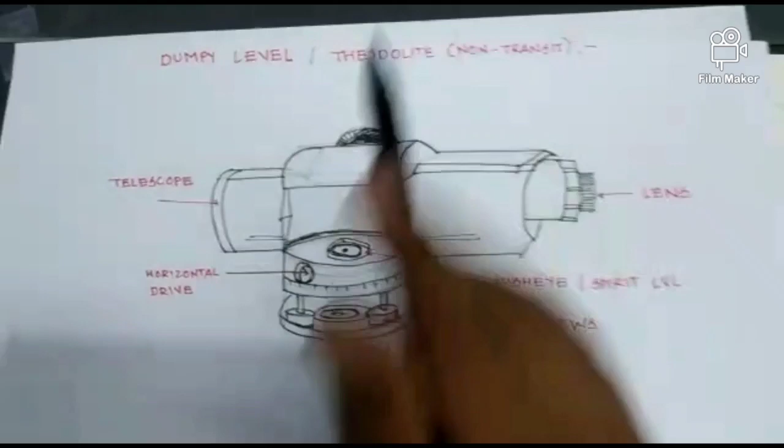This theodolite consists of a telescope and a lens. This lens is used for the adjustment of the crosshair to your eye. We take readings by looking through this lens or telescope at the different levels.

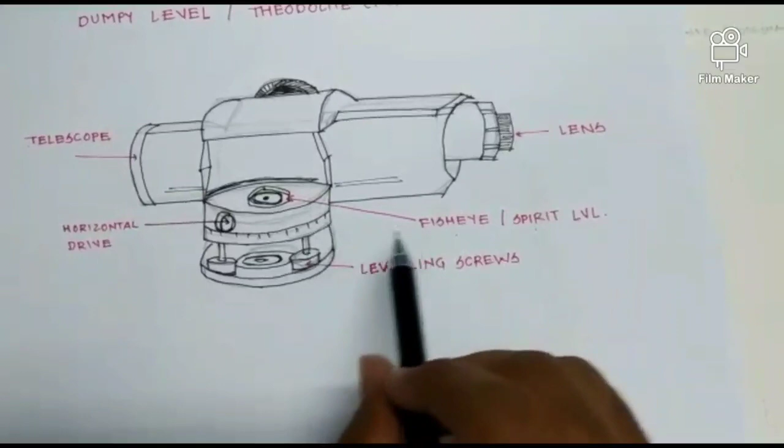This is the fish eye, or spirit level. It's known as a fish eye because it looks like the eye of a fish. The spirit level is used for checking the level of adjustment of the dumpy level.

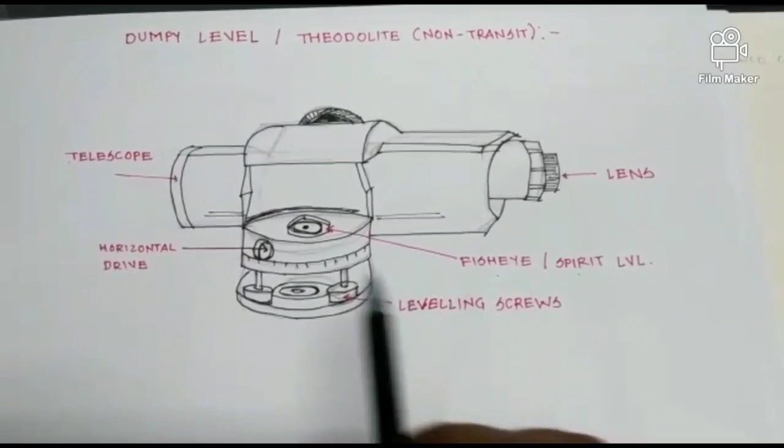It also consists of a horizontal drive and leveling screw. Both screws are used for giving horizontal alignment or adjustment to the dumpy level.

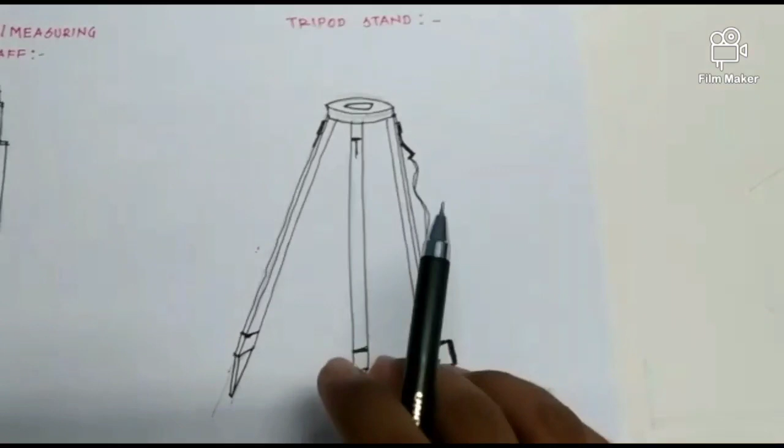This dumpy level or instrument is placed on a tripod stand. The tripod stand is used for placement of the dumpy level, and it has three legs, so it's called a tripod stand. These three legs are placed on the ground level and give horizontal alignment and adjustable placement to the dumpy level or theodolite.

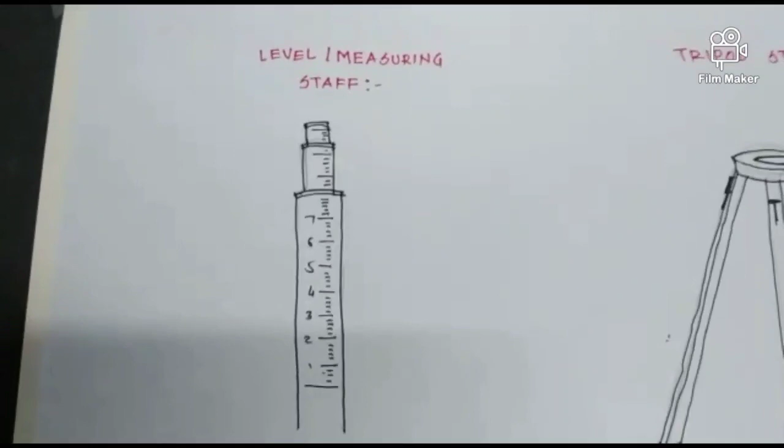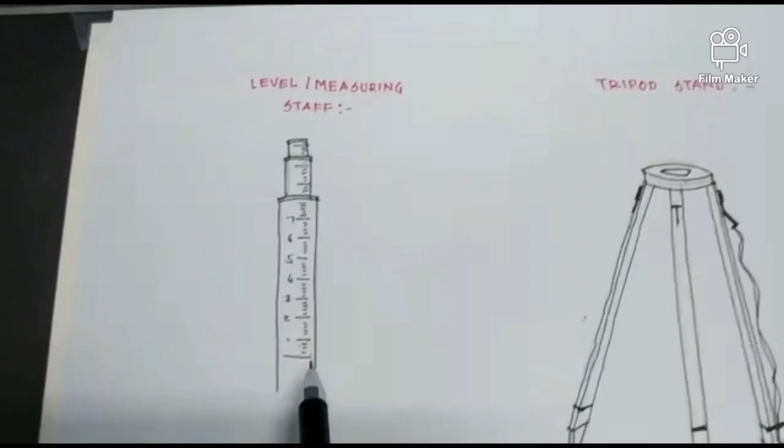For taking measuring points or level distances and height, we use the level or measuring staff. This measuring staff is used for taking readings from the telescope. It has readings on it, and its height increases by adjustment. It's placed at different levels, and we take these readings by looking through the lens.

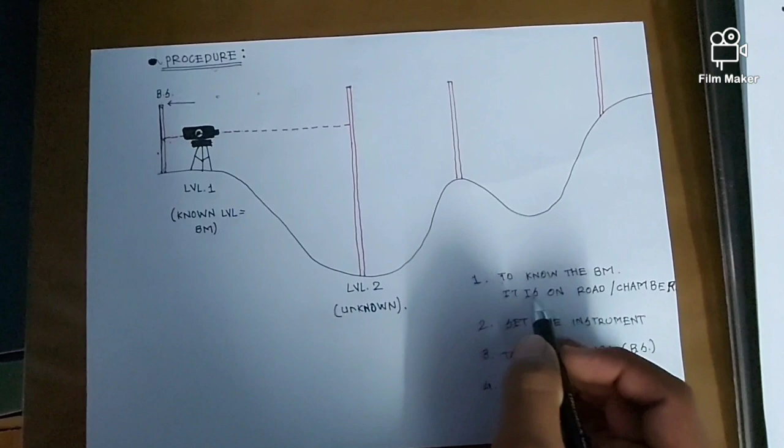For doing a contour survey using a dumpy level or a non-transit theodolite, the procedure is as follows. The first step is to know the benchmark, which is on a road, a flat land, or on a chamber.

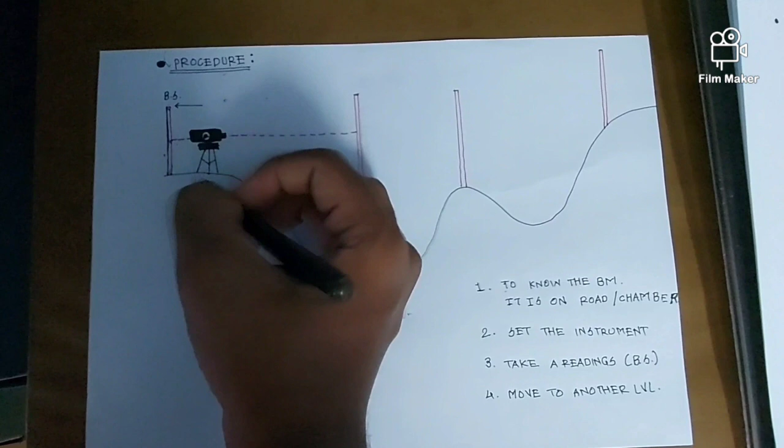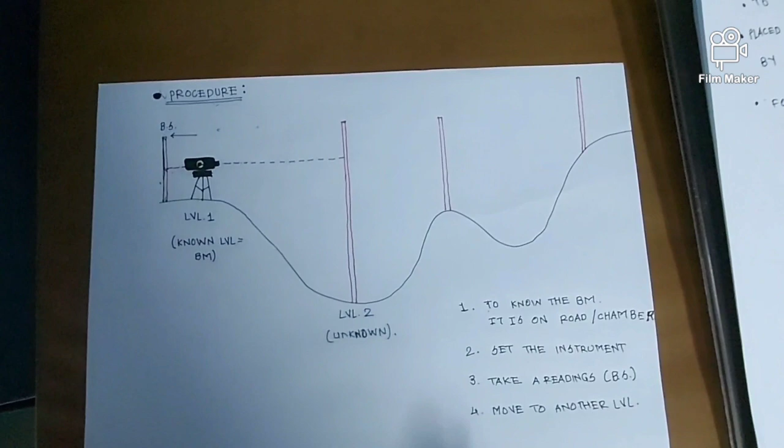So to take a reading on a benchmark, which is the back sight of the instrument, first fix the instrument on the benchmark point. For measuring a benchmark point, the dumpy level is fixed on a tripod stand, and the instrument is arranged on the tripod stand using the fish eye.

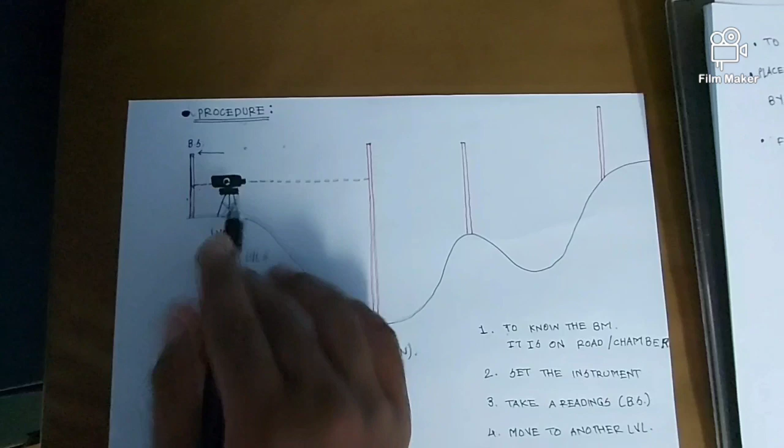The fish eye gives horizontal distance or horizontal adjustment to the instrument, which is the dumpy level. Then take a reading of the benchmark using the measuring staff or level staff. Take the reading point present on the measuring staff, which is placed on the BM, and that is the known level.

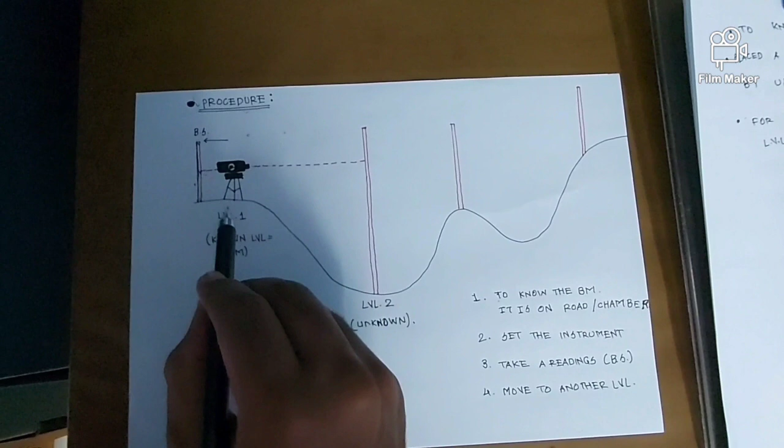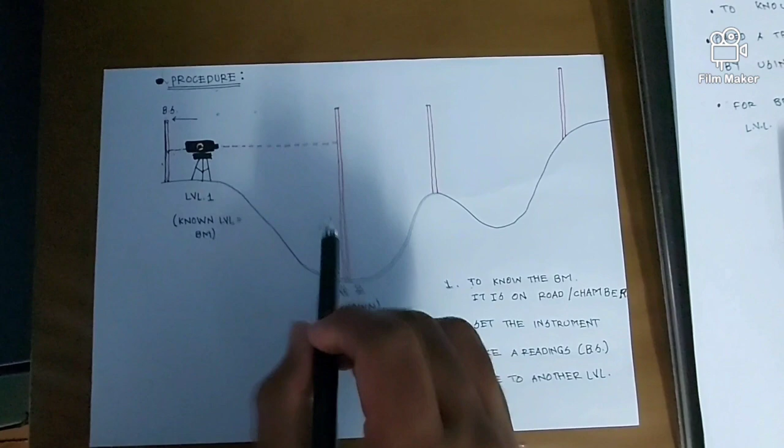So we keep this known level of the BM. Then we go for the second level, which is unknown to us, and this is the level you want to know. Choose this level as per your comfort.

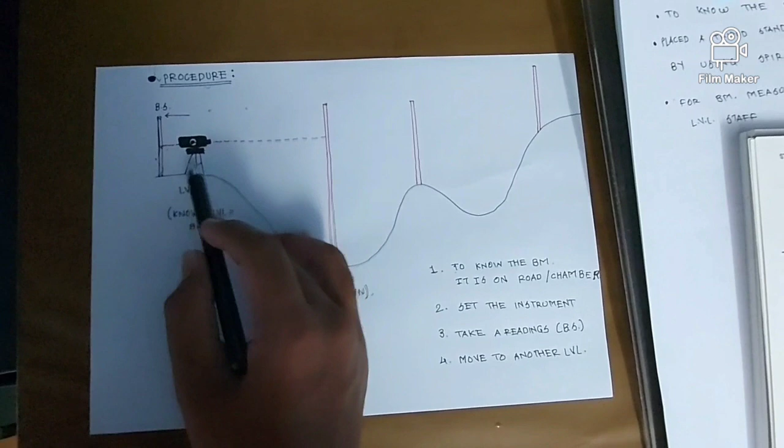When you choose this level, place the level staff on it, and measure the distance between the benchmark and this point, which is the height of the level staff from level 2.

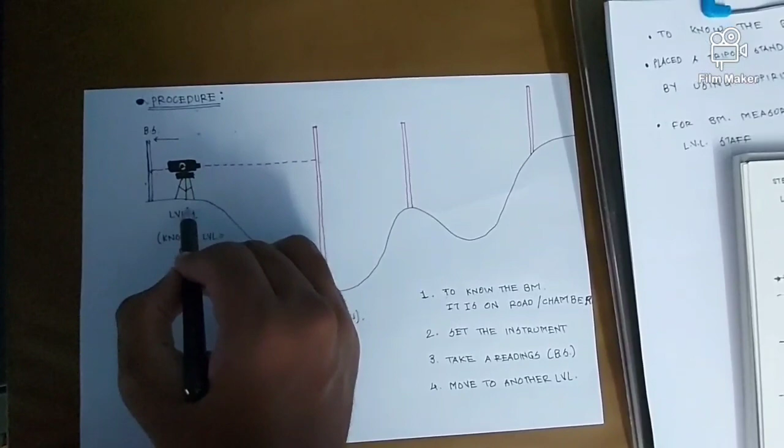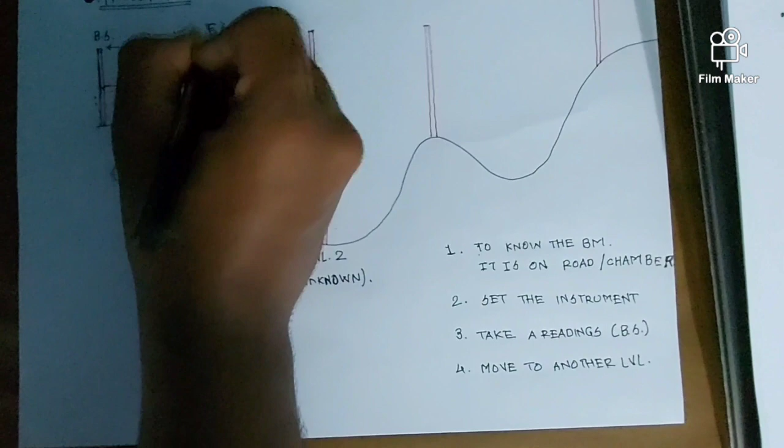First, fix and measure the height of the instrument from the ground level of level 1 using the back sight from the benchmark, and then after the back sight, measure the fore sight, that is FS, fore sight.

This is used for level 2. Then measure the horizontal distance and vertical distance from level 2 to this point, which is the height, and this is the difference between the height of the benchmark or instrument and the other contour level, which is at level 2.

So to take this reading, the instrument or dumpy level is kept on the same location and same contour or site, just rotating this device towards level 2, where the staff is placed, and taking a reading of this point.

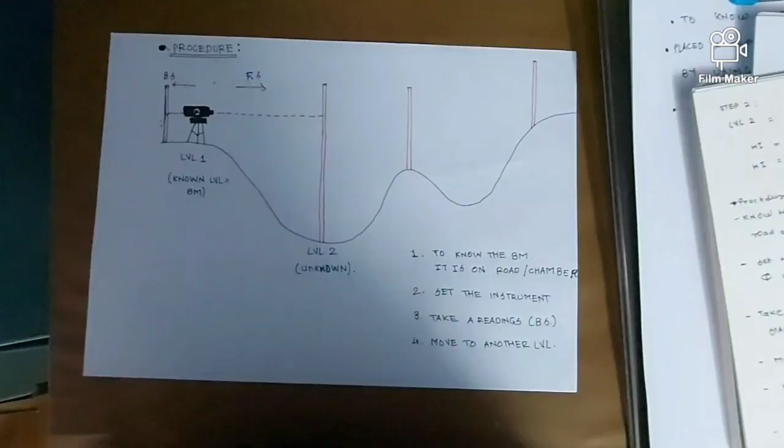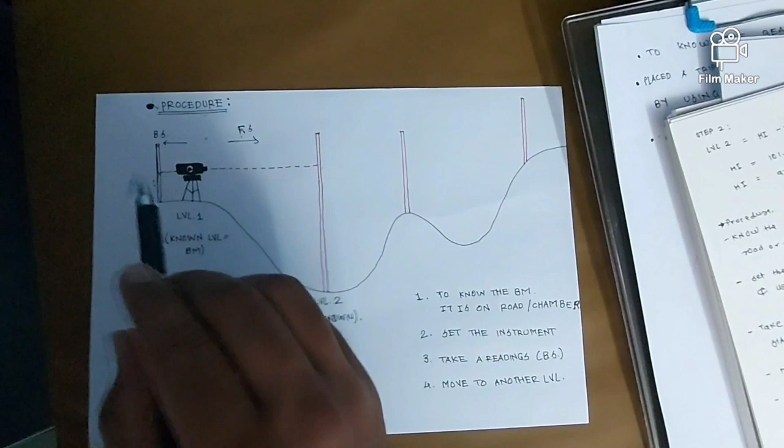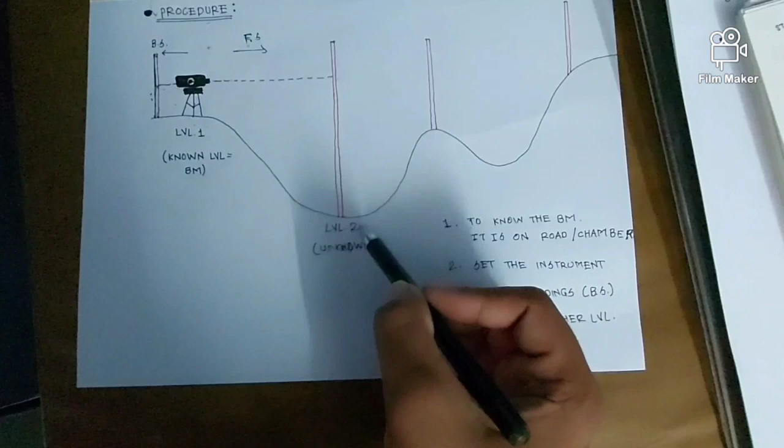So basically the stepwise procedure is: first know the benchmark, then set the instrument using the fish eye on the tripod stand, take a reading of the back sight or benchmark using the level staff, then rotate the device and measure the other level of the level staff or side contour using this level staff. In this process, only the level staff moves while the instrument stays at the same site or location for taking all readings.

These steps are repeated the same way for the further levels, that is level 3, level 4, and so on, and after that we go for the calculations.

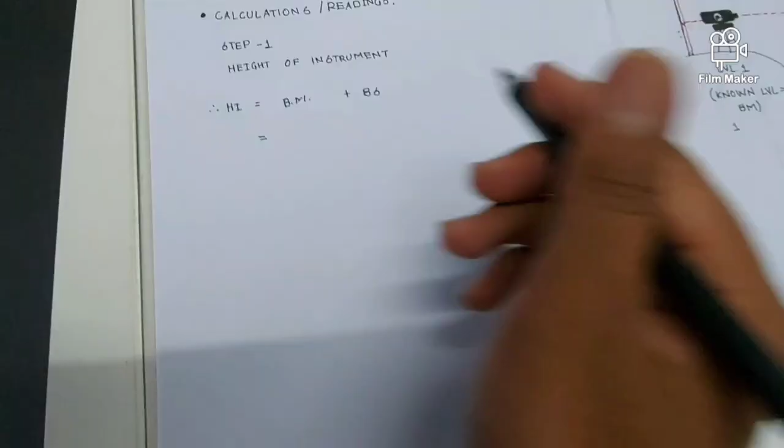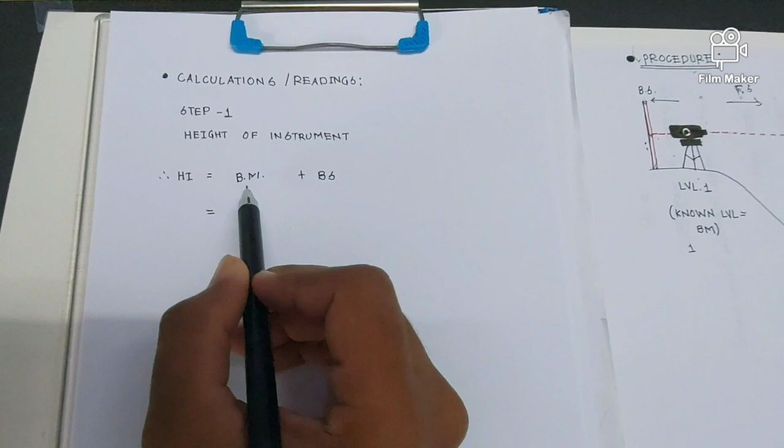So here we go for the calculations of the readings. The first step is to find the height of the instrument. For this, the formula is HI equals BM plus BS, where BM is benchmark and BS is back sight. So the height of instrument is the addition of benchmark plus back sight.

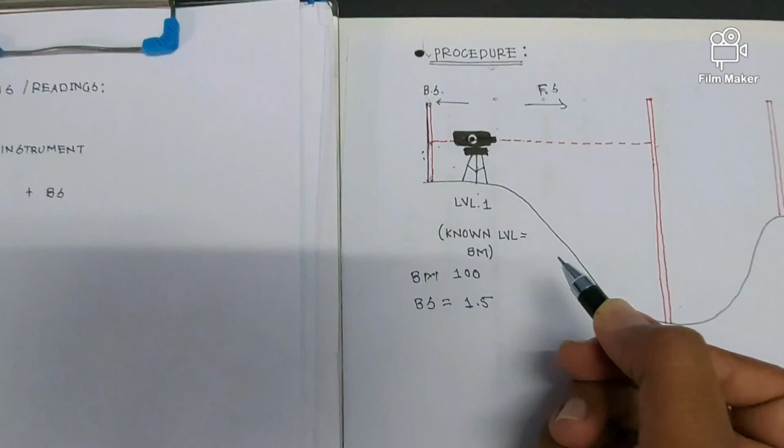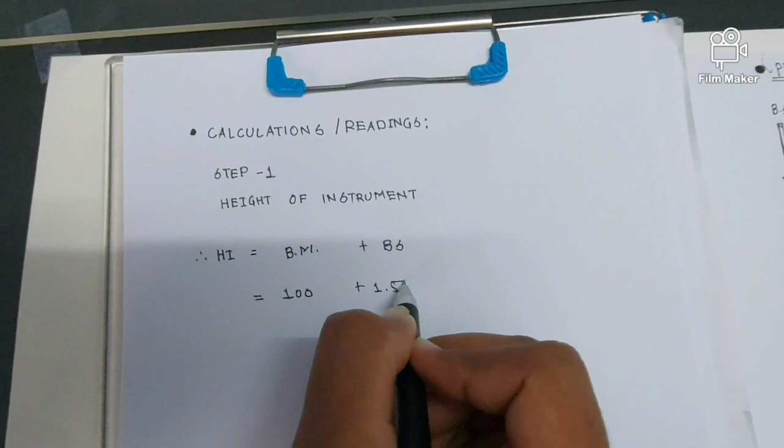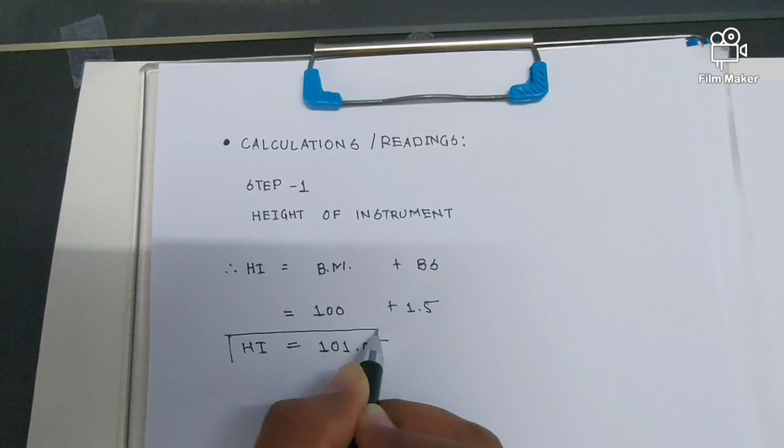Here we consider the benchmark as 100, and the BS, that is the back sight, we consider as 1.5. So we add the BM and BS, that is 1.5 plus 100, giving us the answer 101.5. So this is the height of the instrument, which is step 1 for the calculation of the contour survey.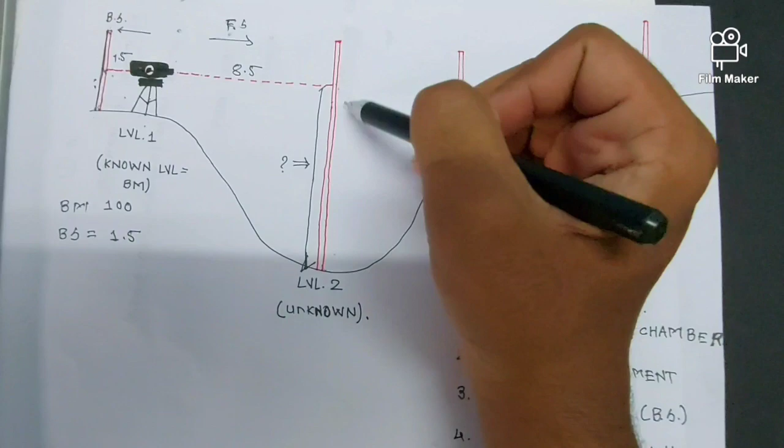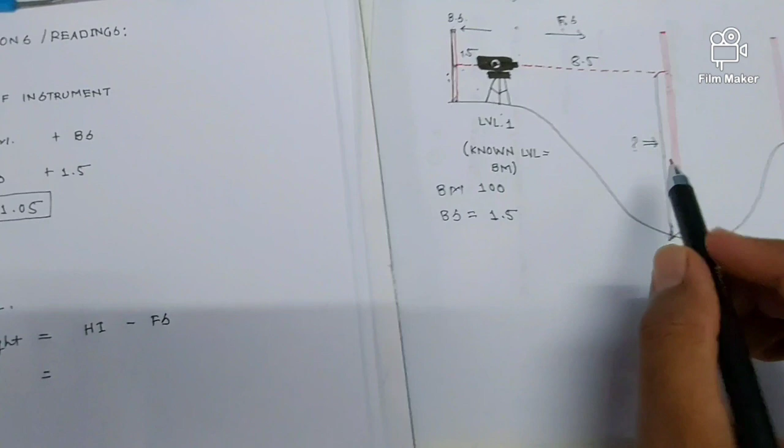So the second step is to find the reduced height, from this point to this point. To find this reduced height, we use the readings of HI and FS.

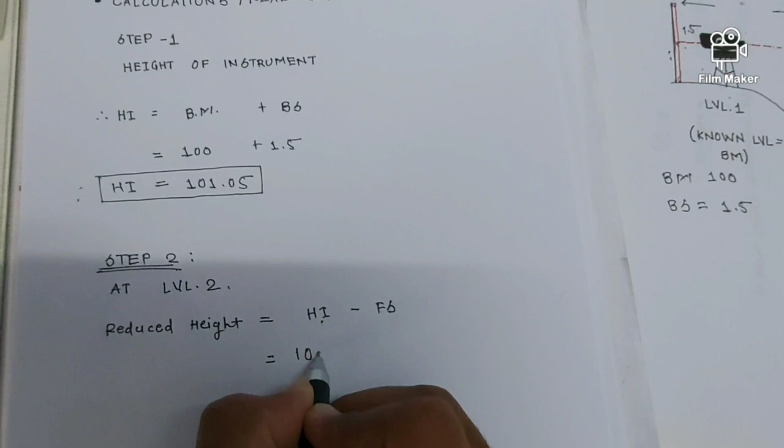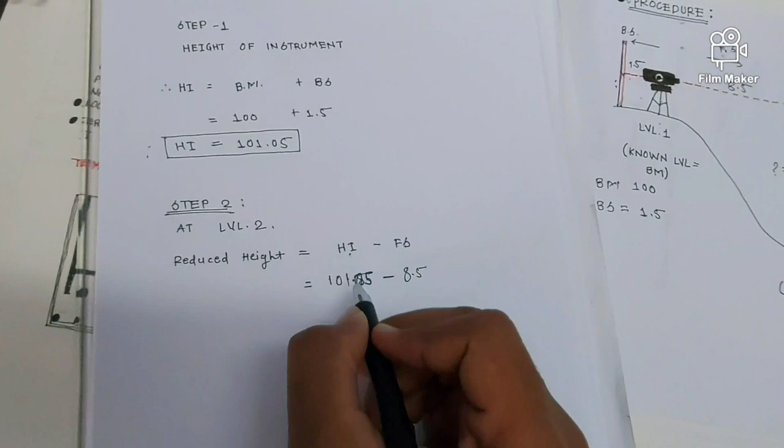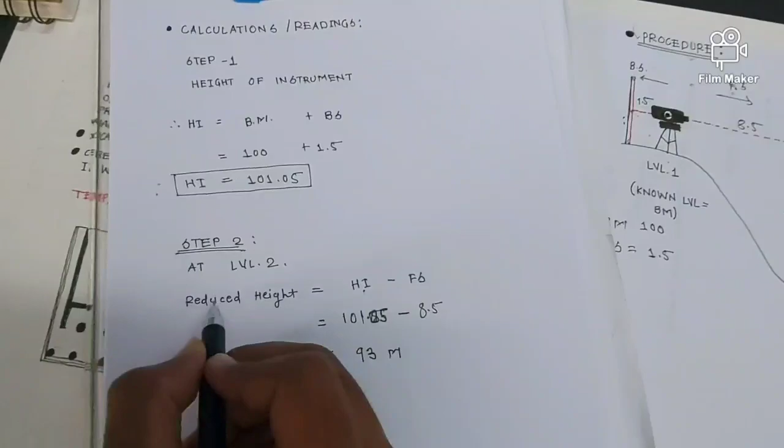HI, which is the height of the instrument we found in the first step, that is 101.05, minus the FS, which is the distance from the benchmark or location of the site to the level 2 staff, the distance between the instrument and level staff, that is the fore sight, FS, which is 8.5 here. So 101.05 minus 8.5, or HI minus FS, gives us an answer of reduced height of 93 meters. So basically this reduced height is considered as the reduced height at that instrument station.

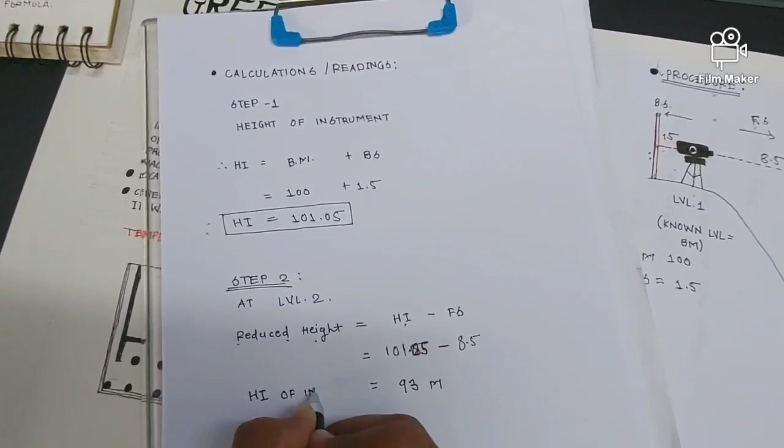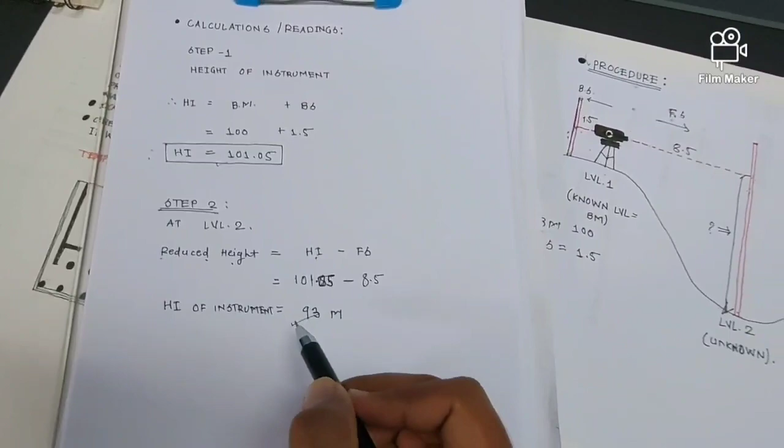So here we have the height of the instrument, then we have another height from level 2, and this is the height at a benchmark.

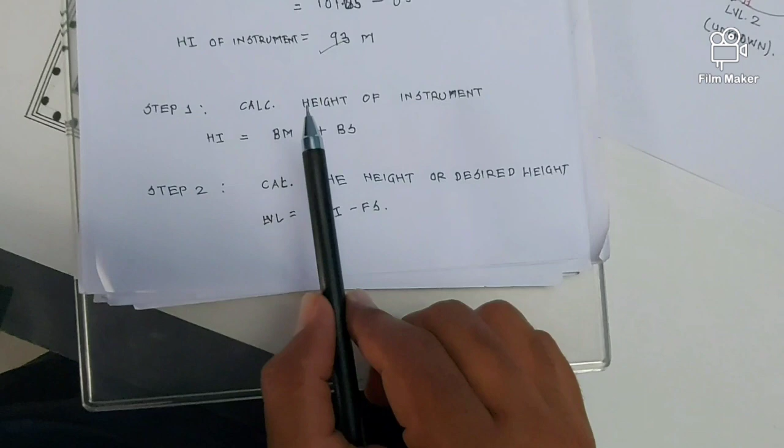So basically, in short, step 1 is to calculate the height of instrument. The formula is HI equals BM plus BS, where BM is benchmark and BS is back sight. So this is the back sight, and this is the BM, that is the height, which is 100.

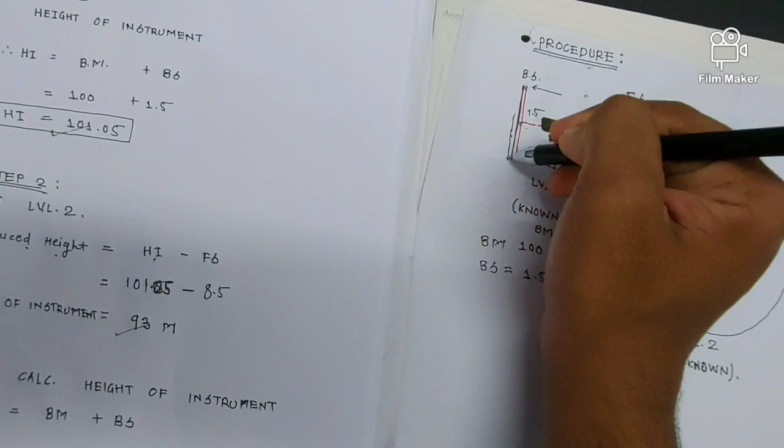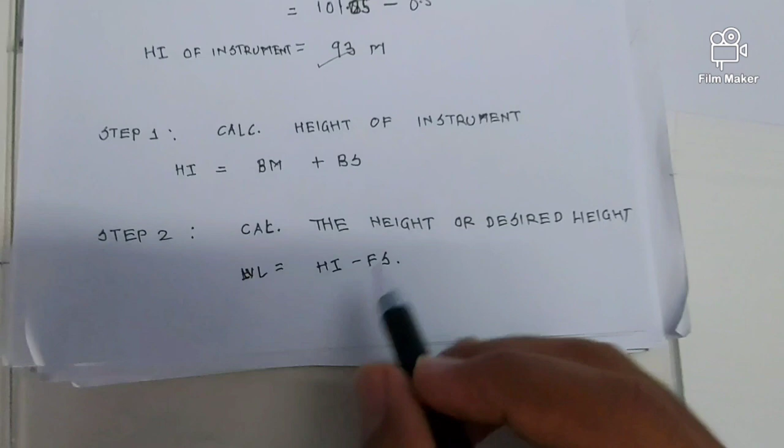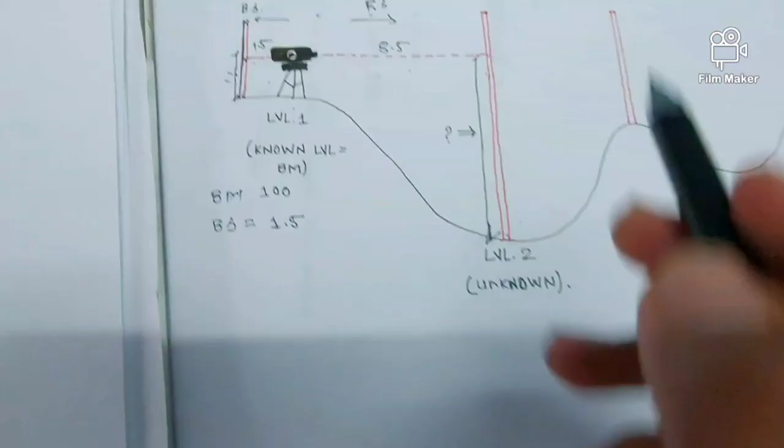And step 2 is to calculate the desired height from level 2, that is the unknown level or reduced level. The formula is HI minus FS, that is height of instrument minus fore sight horizontal distance, that is this one, the 8.5 we have, and the reduced height or desired height is this.